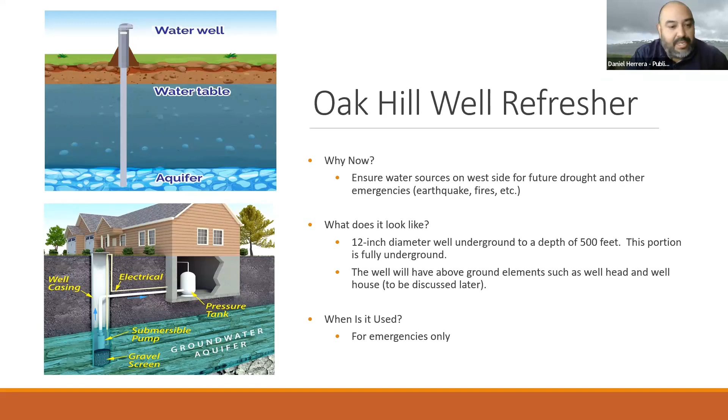We're not going to be drilling that entire time. That's the full scope—mobilizing, getting materials, getting things set up. You'll see activity happening for about that duration.

Right after we start, we're going to be looking at engaging the community. In the fall and winter, we're looking at holding some community workshops, soliciting feedback on some of these visible elements for the well. Ultimately, in the winter, we're looking at completing the well drilling portion, having the well installed, and then later in the winter, possibly early spring, we'll have final completion of the well, finishing off those visible elements, giving us a complete well that can deliver water into our system.

We want to be fully transparent on what you're going to see during the construction period. On the left, we show a truck-mounted drill rig—this is the equipment that actually drills the well to a depth of 500 feet. In the center picture you'll see a sound wall. We're going to be putting up about 20-foot sound walls—this is sound attenuation to dampen and deflect the sound and activity so that residents in the area don't really feel the impact of the construction period.

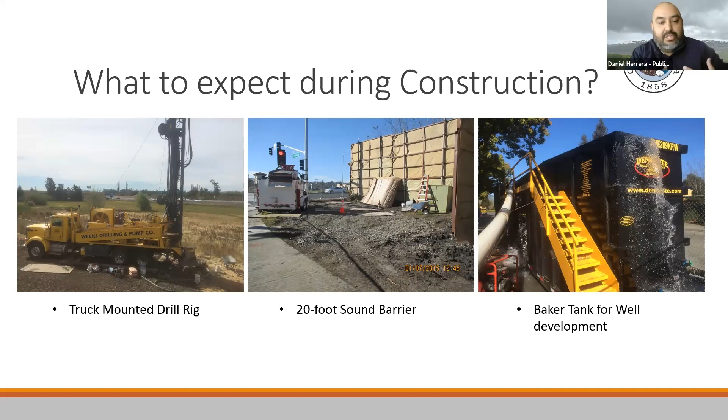And on the right, we have something called a Baker tank. Ultimately this is a method to capture water that comes through the well development activities. This is used to capture the water, clarify it, let sediment drop out, so that we can discharge the water to our system and take the solids out and dispose of them properly.

What I have here is an aerial view of these construction activities. What you'll see in yellow is our laydown area—it's kind of behind that labyrinth and closer to some fences for some homes, with not a lot of construction going on there. This is really for storage of materials or any piping used during the construction process.

The work area shown in blue is really where that activity is going to be happening. I have the drill rig shown, the location of the well, the potential location for that Baker tank, and also showing where some potential sound walls would go. This isn't final, but we're looking at some possibilities to implement those sound walls so that it deflects and dampens any of the noise activities in that area.

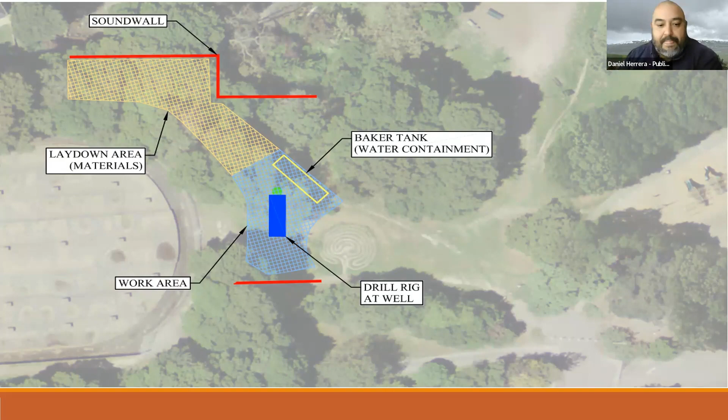Now that we've talked about what's actually happening during construction, I wanted to go over what the final elements are and where we're really going to be looking at soliciting community feedback from our community. There are three elements that we're looking at.

It's the wellhead location, shown here—this is right off of the labyrinth, this is where the location of the well is going to be. We're also looking at the well house itself, which is going to be up on that upper ridge, closer to the reservoir. And we also need a PG&E transformer that delivers power to the well.

These are really opportunities for us to solicit feedback, because these are things that as the community visits the site on a daily basis, you're going to be looking and seeing these elements. We really want to solicit feedback and know what the community wants, so that they have something they're proud of, that they can be okay with as additions to the Oak Hill site.

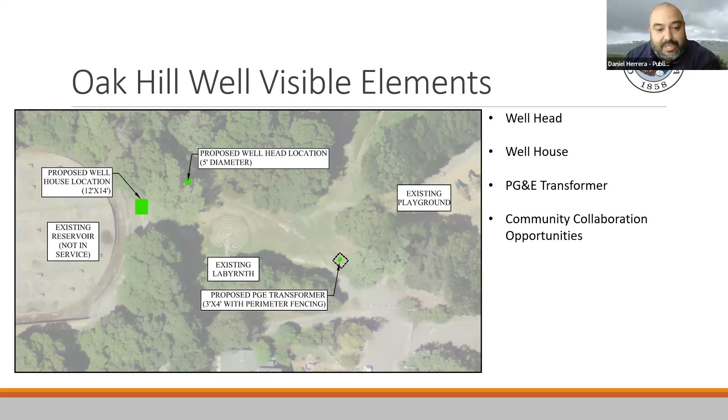Here, next to the labyrinth, this is ultimately where the wellhead is going to be, and up on this little hill right here—sorry, I'm using the wrong cursor—up on this hill is where the well house is going to be.

Throughout this whole process, once we're done with the well house, we're going to be maintaining this footpath, knowing how important it is to the community to keep that in place so the community can utilize the site for walking and other activities.

So now I want to talk about what these visible elements actually are. What is a wellhead? What's a well house? What are these things? The wellhead is, again, the actual location of the well. Here's a rough diagram of what a well is.

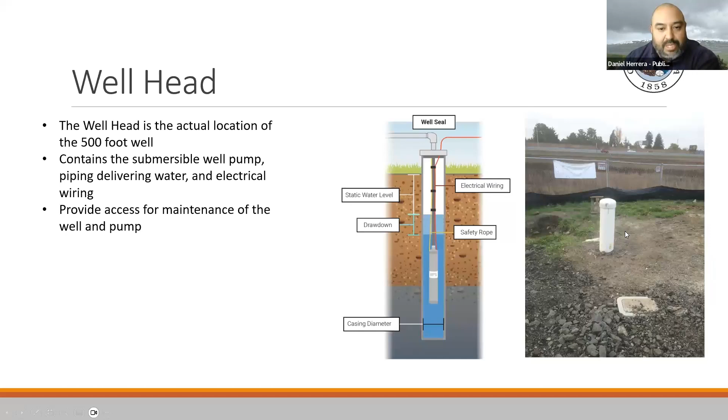That being said, that's not how we want to finish the project. What we're not going to do is have that PVC pipe sticking up out of the ground. We're not going to have any sort of visible piping running along the ground.

Ultimately, we want to put something that could be used by the community. It could be as unintrusive as a manhole lid—completely underground, nothing that you really see—or we could install something more usable, like a seating area, something more visual.

This is where we're looking at possibly engaging the community. We'll be holding a community workshop, possibly an online survey, and other methods to gauge everyone in that area and see what's really wanted—what the public wants to see at Oak Hill.

So the other element is our well house. Essentially, this contains some of the brains and important parts of the well. This is where we have our electrical controls, what starts and stops the well pump. This is where we have our flow measuring devices, making sure we're measuring all the flow that comes in and out of the ground. We have our SCADA, which communicates the well to the water field office that we have next to the Lucchesi Pond. And ultimately there are disinfection elements to ensure the health and safety of the residents of Petaluma. This here is our well house that we have at Del Oro Park.

Lastly, we need a PG&E transformer at the site. For this well, we need 3-phase power. It's a special type of power that requires an above ground transformer, but we actually see it as an opportunity for a possible art project.

Again, it's located at that entrance. We have a security gate right off of Park Avenue. This is where we are going to find opportunities for, hey, we can have some art. We can have something really beautiful that as people visit Oak Hill, it's something they can be proud of and something they can visit and see.

So we have an in-house public art representation that I've engaged, and we're looking at future opportunities for artists. As we move along in the process, we're going to be engaging the community. Is this something you like? Is this something you might not like? We want to solicit that feedback to make sure we're doing it the right way.

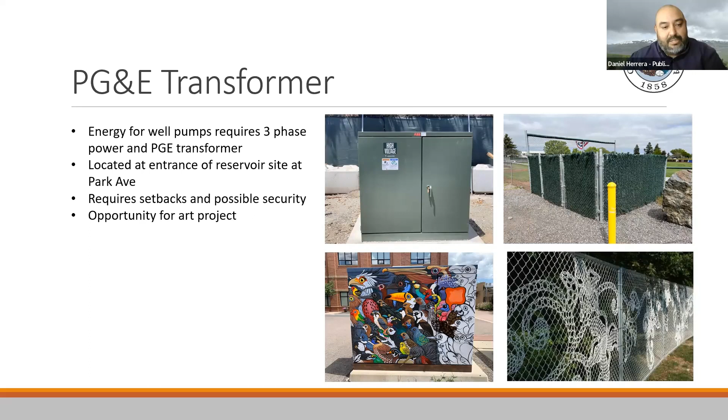Now that is essentially what our Oak Hill Well project is. There are other projects in the pipeline that we've been looking at. It's a much bigger site. We have that reservoir, and now I'm going to pass it along to Erica, so she can really talk about what our next steps are in the area.

Thanks, Dan. Good evening, everybody. I'm going to very briefly touch on a future upcoming project that we're just beginning the planning process for. In fact, this year would be the first time we begin to look at a scope for bringing on some consulting resources to begin a very preliminary planning phase of this project.

What we're looking at doing over the next several years is replacing the existing Oak Hill reservoir or tank at the top of the hill, which has been decommissioned since 2015 due to structural issues and the need to replace its roof. Rather than proceeding with upgrades at that time, the city decommissioned the reservoir itself, and now we're looking at planning for its replacement.

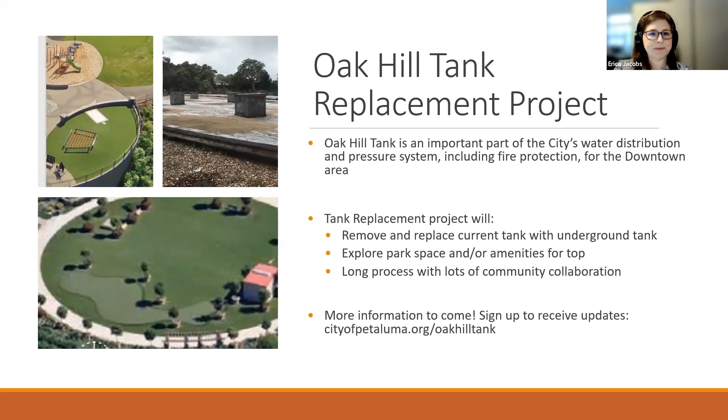As I stated, we're just now beginning the planning process to get this project up and running. In 2024, we'd hopefully have consulting resources on board, beginning preliminary design and environmental studies to understand the site better and what our parameters are. Then moving into a more formal design and permitting process in about 2025 through 27, and not really anticipating beginning any kind of construction until around 2028.

But again, that community engagement is going to be a critical piece of this all along the way. As we further delve into the project, we'll develop a schedule that highlights those opportunities, including things like workshops, website updates, online surveys, and all kinds of things where we could become visible in the community and talking to you there on site as well.

With that, I think that's all we have on that project for now. I'm going to turn it back over to Jessica for next steps. Or Dan. Sure. Did you want to, Jessica, you want me to start? I could talk about the. Yeah, go ahead, Dan. Yeah, just the construction project.

So again, how will you know what we're doing and when we're doing it? For the construction project, generally we have our mailers that go out. We're going to inform the public weeks in advance with really targeted dates of when we're going to start and stop construction activities there. We have our Oak Hill Well website that we're going to be updating regularly as we get into the process of when this is bid, when the construction window is going to start.

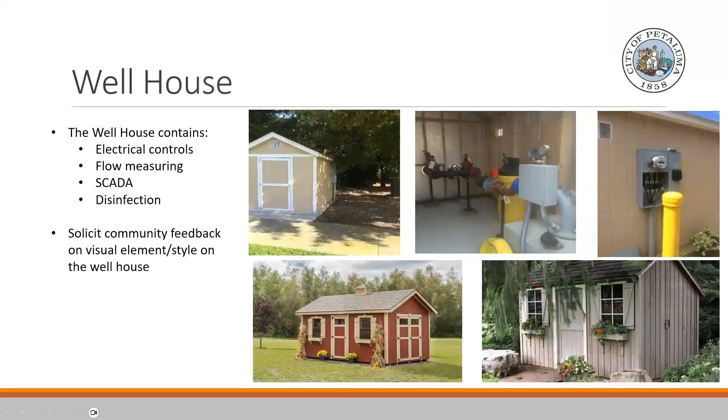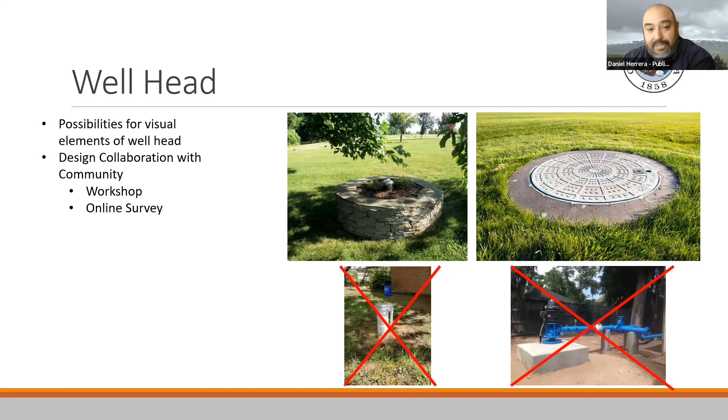All right, and promise me this: as we get closer to construction, let's trade cell phone numbers. Sure, yes please. I think I have my landline now, it's on the website. I've had a couple phone calls this evening helping people access this website. But please feel free to contact me. That's my landline, I have my email. But yeah, I can get your cell phone. You can have my work cell phone, and we'll talk with each other throughout the construction process.

Thank you, Dan. No problem.